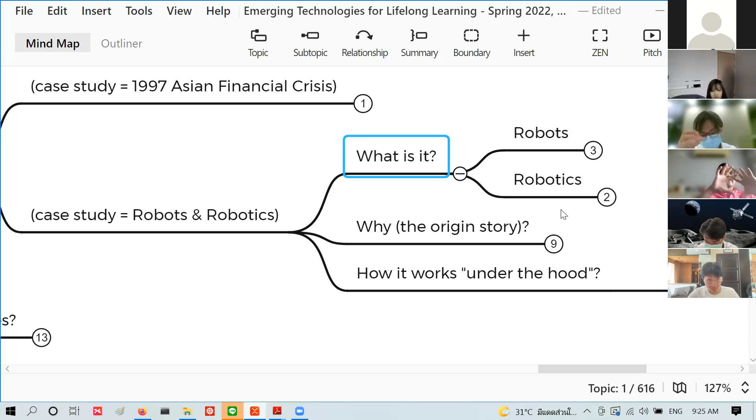The other thing is the whole art, science, technology, mathematics, computational platform - everything that underlies this whole field that develops the automobiles, or in this case, robots. So robots is sort of like the thing itself. Robotics is the art and science that basically produces a robot at the end of the day.

So robot - what is a robot? To give you a good definition, this is our working definition: it is computerized electromechanical machinery, designed to do things that we humans are not able to, cannot economically or safely, or simply don't want to do by ourselves. Now this is going to be our operational definition - I'll show you what I mean by that in a minute.

What I mean is that some robot use cases would be playing into this aspect - in other words, you have this kind of robot because human beings are not able to do it. In some cases, we can do it, but we can't do it economically or safely. In some cases, we just don't want to do it ourselves.

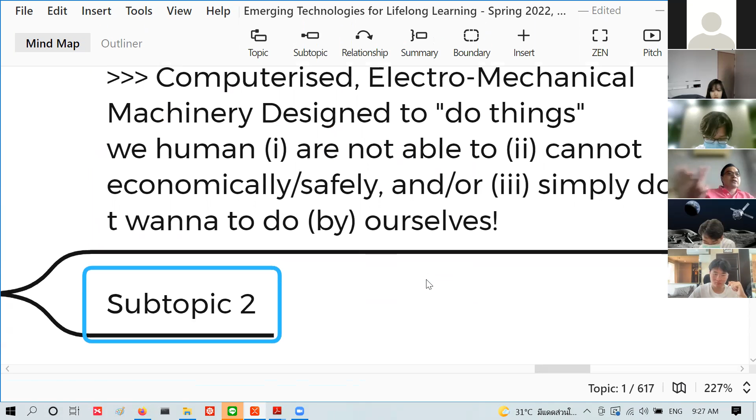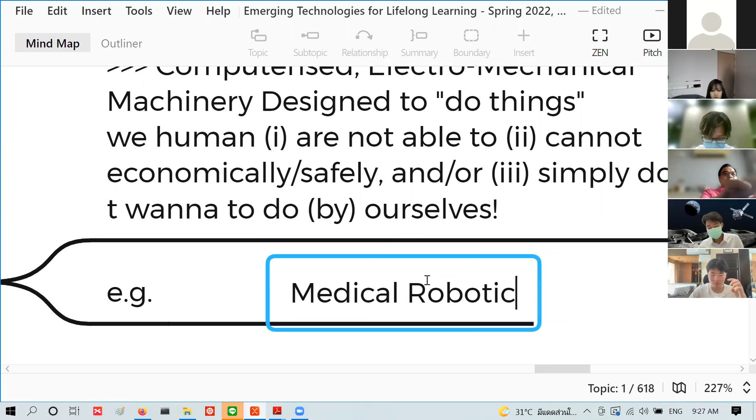So when we say we don't want to do this by ourselves, or we cannot do this by ourselves, robots then become an extension - so we still do it. For example, just to get ahead of the game, I'll give you two forms of robots. Let's say, for example, we have medical robotics used in surgery, and then we have a Roomba.

You know what a Roomba is, right? It's a robot that vacuums things for you.

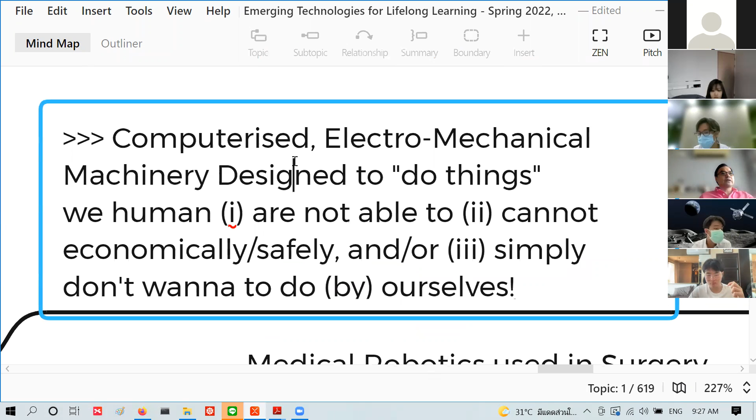In this case, by the very definition, it's this: computerized electromechanical design to do things that we humans are not able to do by ourselves. Okay, this will be the case.

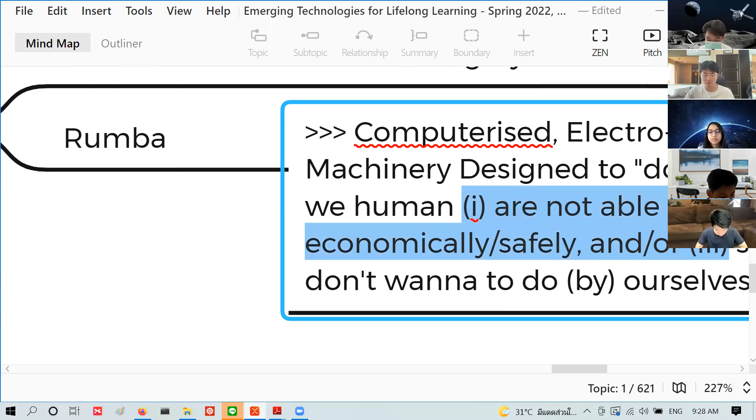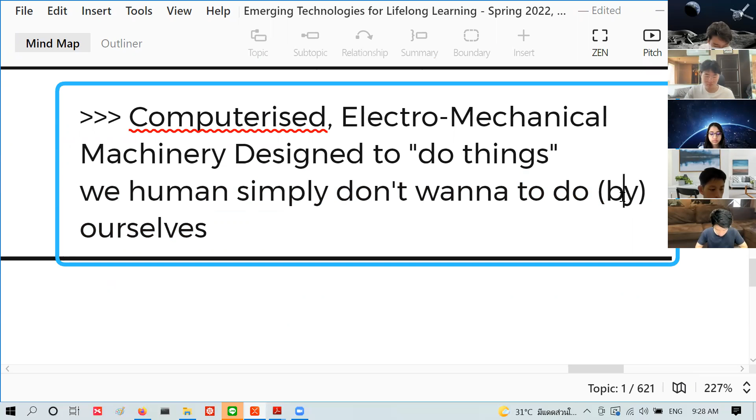On the other hand, if you're talking about Roomba, it's computerized electromechanical machinery to do things we humans simply don't want to do ourselves. So that's very different. Okay, so both of these are definitions of robots, but how much of a definition is different, right?

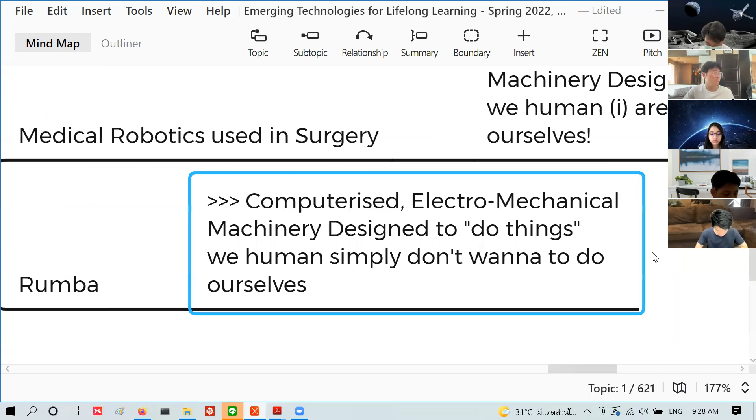In medical robotics, used in surgery, it's designed to do things that we cannot do by ourselves, because it requires steady hands. It requires a lot of strenuous force. If you do surgery, it's delicate, but you also have to spread chest or bones apart or whatever, right? And you also need a lot of magnification.

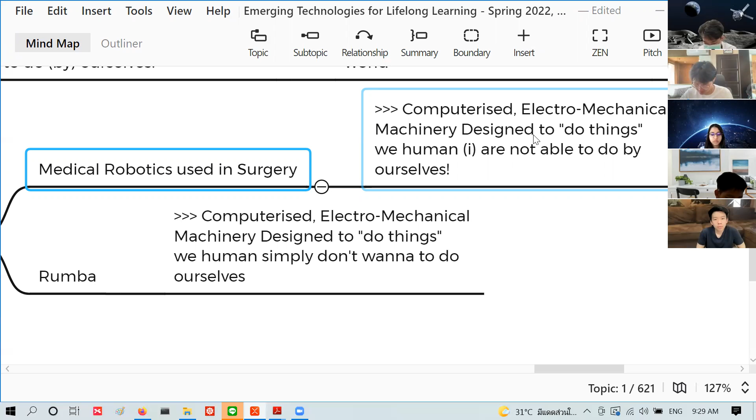Sometimes it's very precise, in a very hard to control environment, because you're working in a body where the heart is still beating, let's say. So some of the tasks are so delicate that doctors cannot do them by themselves. They're still operating the surgery, so robots become like an extension. So this is the word: by ourselves. We still do it, but we don't do it by ourselves.

Whereas with Roomba, we just don't want to do it ourselves. We just let the Roomba run. It's not something that we can't do, it's not something that we can't do economically, we just don't want to bother, right? So that becomes our operational definition.

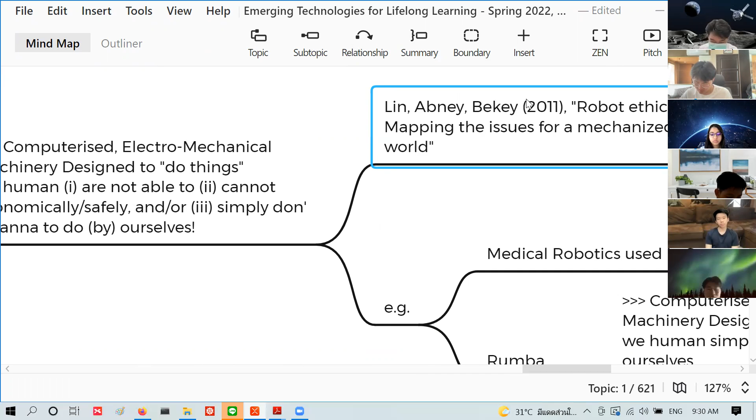But notice, I refer to this paper here - robot ethics, mapping the issues for a mechanized world - and in fact, right away, I think I said the word dirty. There it is. So robots, to quote this paper, are basically often designed, not always, to do three things, or things that satisfy what's called the 3Ds of robotics.

So basically jobs that are D for dull - that's like Roomba, right? Dirty, and dangerous. So this would not cover, for example, medical robotics in surgery, but it certainly would cover things like sending in robot creepy crawlies, robot worms or robot dogs into an earthquake disaster zone, because as you're searching for survivors, you have to crawl under collapsed buildings, which may further collapse onto a search and rescue party.

And dirty - well, you can think of dirty and dangerous together as working, for example, in a situation involving a nuclear plant disaster. Fukushima, for example, is a very good case in point. There was a lot of effort at that time to send in robots, not necessarily humanoid robots, to actually go in and maybe shut off the valves, or at the very least take a reading. So it's very dirty in that sense, and that's kind of radioactive, dangerous. So you can't send in humans, you need to send in robots.

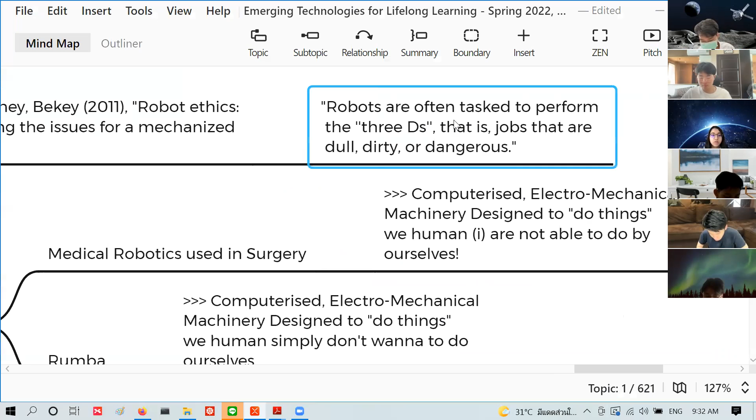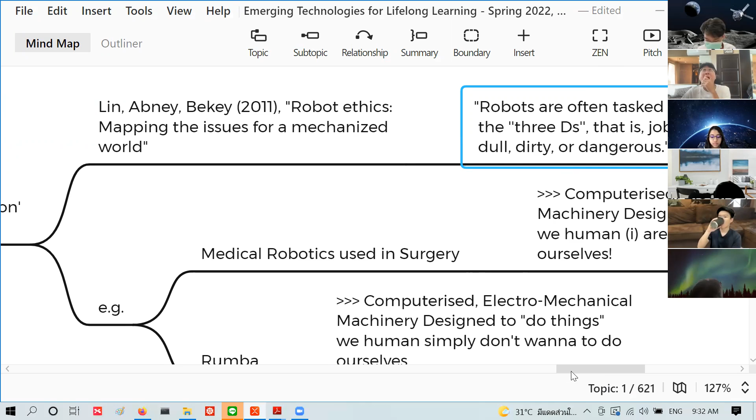So those are sort of a very utilitarian perspective. These 3Ds are not everything, but notice it's often tasked to perform - this is kind of the utilitarian perspective on robots. So this is not all, you can think of this as a subset of what robots are asked to do - more utilitarian things, something like cannot do economically, I don't want to. Fine, so that's the definition.

Now, why do I want you to pay very good attention to this? Because there are actually three different words here that you may not notice: one is computerized, one is electro, one is mechanical. Now it goes in this order. You can think of it this way: historically, robots were mechanical. We had mechanical robots.

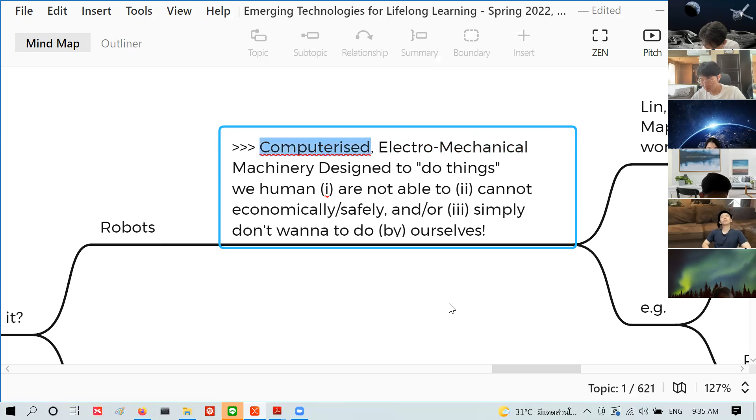So this definition is where we stand today: mechanical, electro, computerized. That's also the reason why in university you can study mechanical engineering and end up being a key breakthrough innovator in robotics. You can study electrical engineering and also be a key innovator in robotics. You can also study computer engineering or computer science and be in the driving seat of the robotics revolution. These are the three fundamental disciplines that drive robotics.

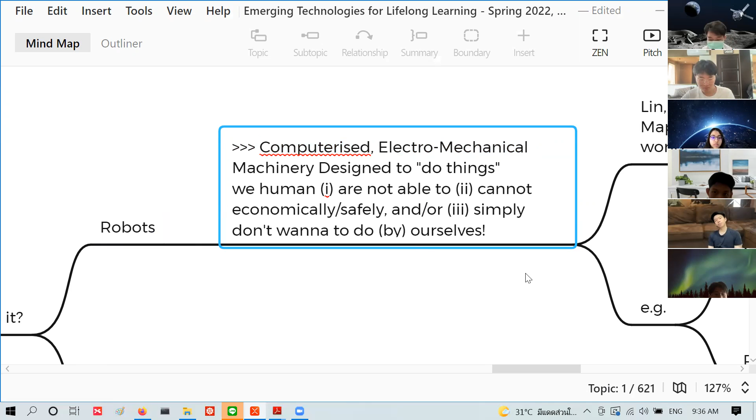So in the spirit of integrated innovation, you can say that robot is an innovation that came from integrating not only mechanical engineering and electrical engineering, but also computer science and computer engineering, which includes AI and everything else that comes with that. This is very much in the spirit of the school: integrated innovation. So that's kind of like a definition.

That's a definition. Now, what is robotics? Well, robotics is kind of like the science that produces it, so to speak.

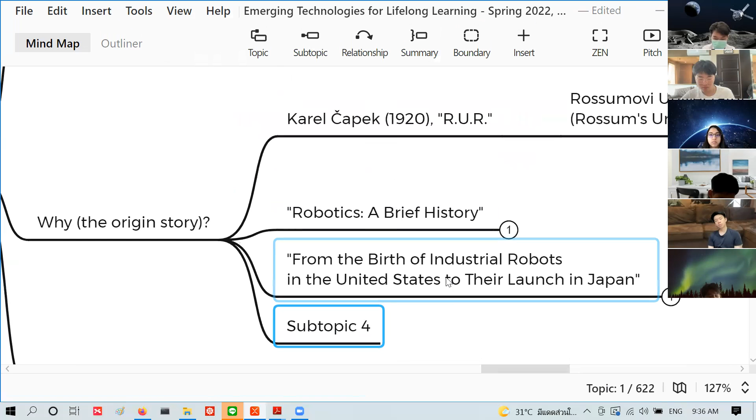Now this is very important: construction and use. So there's construction, how it works and so forth, and use, that's where the use case thing comes from. Now, I expand this definition a little bit to the art and science of engineered creation. I use the word carefully, creation, in this case, not just construction, because nowadays you actually are very creative.

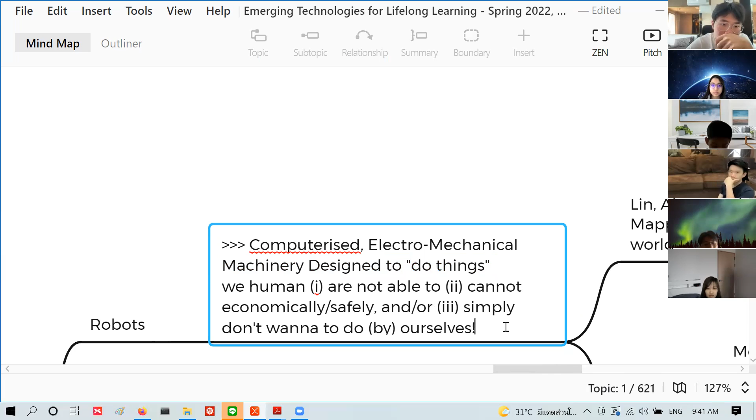So the emphasis, very important, the emphasis is on the do. Robot is designed to do. Okay, now this becomes a little bit more involved, we'll see later. Okay, so that's it. That's what it's designed to do. That's what it is. It's designed to do things. Okay, it's not there just for entertainment.

If you take this apart, I don't know if there are pictures of it, of the gearing. Yeah, I think maybe there's a website that shows a picture. Anyway, it's fascinating, when you go inside you see it's like a mechanical watch, except it's a lot more intricate, and it's programmable even. You can literally program this to draw a signature. So in a sense, if you can think of making a signature as a task, then yeah, it is a useful robot, so to speak.

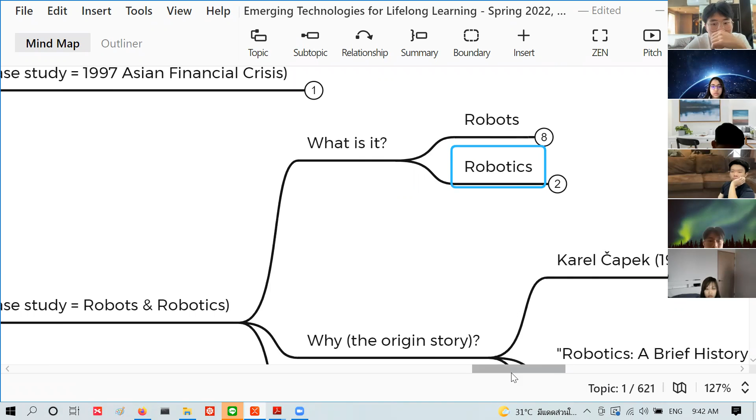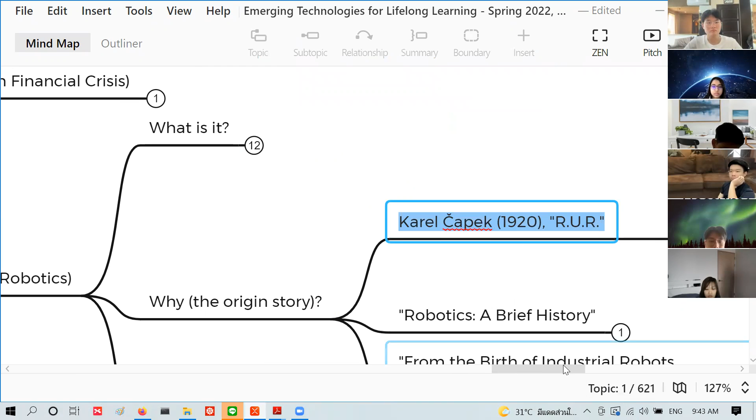Robot doesn't mean anything fancy. Robot means something that's doing some kind of repetitive task. So basically, this guy invents robot to do chores, do things that he doesn't want to do. So basically it gets back to this very definition, right? So this is what he created robot for. He creates a robot for things that he doesn't want to do. He doesn't want to do.

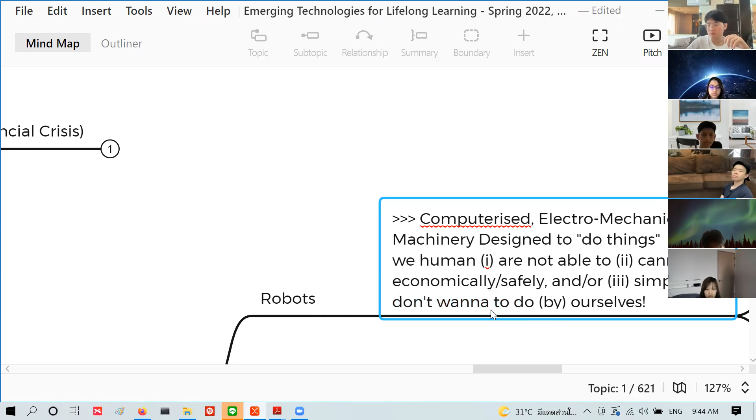So let's say humans are lazy, we want people to serve us. We want servants, but we can't have human servants, so we have mechanical servants. So think of robots as mechanical servants, do things we don't want to do for us. And by things we don't want to do, we mean activities that are not creative, mundane, tedious. The emphasis is on the word tedious, tedium.

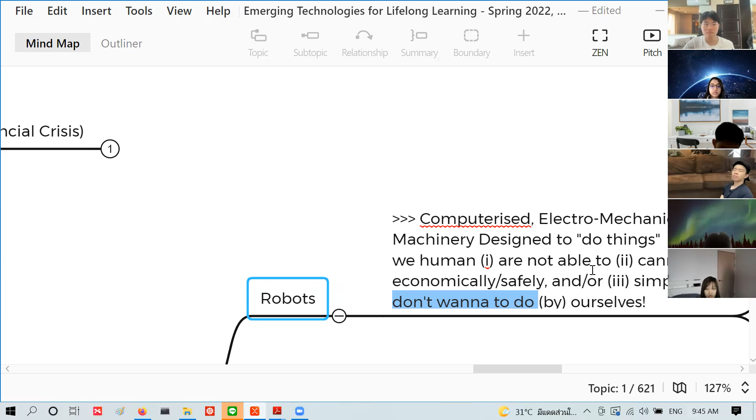Okay, boring, tedium, daily grind. Sort of thing that in a way is a reaction to the Victorian industrialization, where human beings become something monotonous, doing something very mechanical, very monotonous. So if you have this robot, that's great, right? So humans don't have to do monotonous things anymore. So that's the origin of the phrase, right?

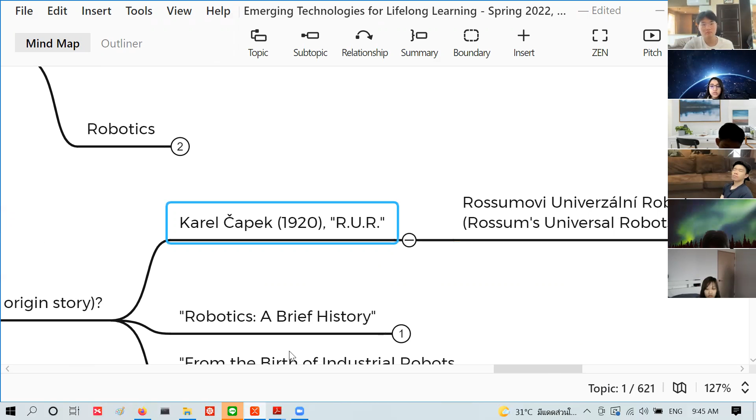And in fact, I gave you some very good reference here, a brief history. Now, a website I want you to look at is very interesting, because this is what happens in fiction: this guy wants a mechanical thing that does things for him, but the things he wants them to do were previously done by humans. This is the important distinction.

So, the machine that he creates to do things for him resembles human for that very reason. So this humanoid thing is different from this other one, where you make the thing look like a real human because it's a marvel, it's pretty, right? It looks pretty.

You want it to have a human-like form, okay? You want it human-like because it's a joy, it's wonderful to look at. You can say, yeah, this humanoid robot is pretty handsome, but the crux of the matter is it's supposed to do things previously done by humans. So the humanoid part is because you need human form to do human tasks. That's what it means.

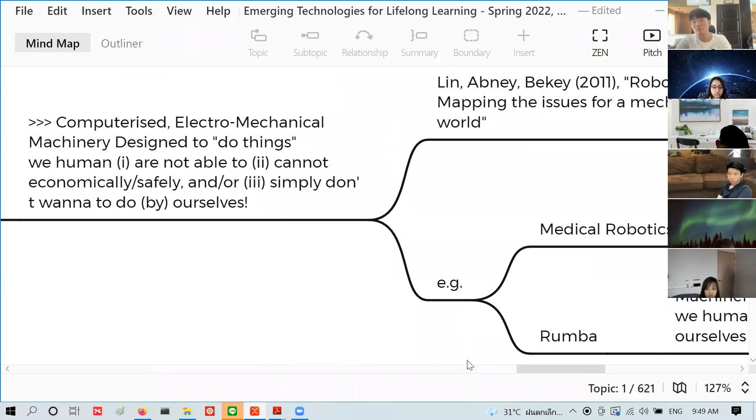So this became the first instance where you have this thing - we are not able to do in humans. There are two things we cannot do: lift heavy things, or be extremely precise on a nano scale or micron scale.

The crane was invented to do things that human beings could not do, right? Well, this is invented to do things that humans could do if it had more power, if the arm were bigger. Okay, so that's what makes this different from a crane.

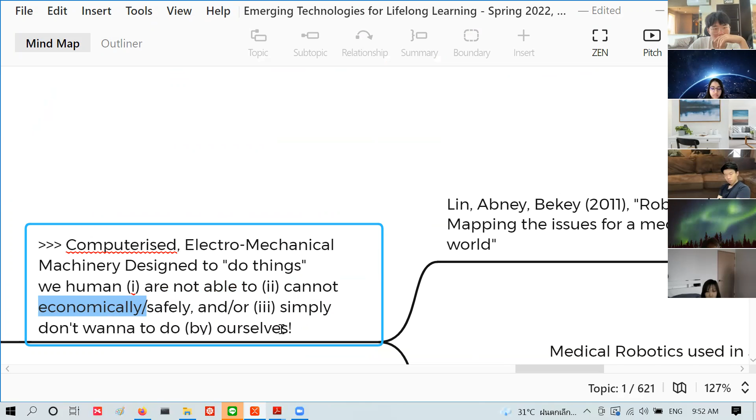So nowadays we get to the point where this definition is not the case. It's now this, okay. You can still hand make cars - in fact, some old school auto shops still pride themselves on handcraft. But you can't do it economically, you can't mass produce, so economically becomes the key. So nowadays, if you're talking about any kind of mass produced car, it's volume, it's quick.

So obviously this is Kawasaki side, so that's kind of called Kawasaki robot, but you can have many others. Nowadays you can't really make automobiles without robots economically. You just can't scale up.

And then this becomes the next thing, which is to sort of democratize the use of robots for everyone. So think about it - you used to have a big computer that was used by companies, and then you have personal computers. Well, now you can have personal robots. So it's moving to that end. Anyway, this is what I mean by the historical roots - that's the origin story.

Now, how it works under the hood. This is something that's a little bit beyond us to really understand how it works under the hood, unless you go into the applied digital intelligence track, where you'd be able to take robotics - I encourage you to do so. Not even from our class, but literally cross-register with Chulalongkorn's engineering school, cross-register with their robotics. But what I want to do is delineate what it means by working under the hood.

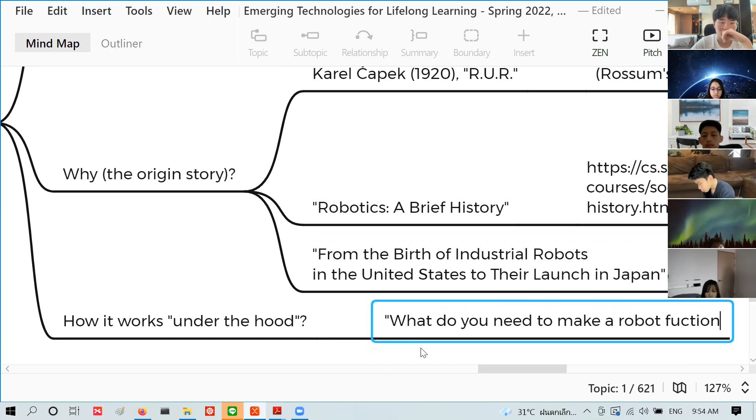Well, first of all, what do you need? What do you need to make a robot work? Well, remember, we're talking about robots replacing human beings. So what do we need to make a human? Let's imagine.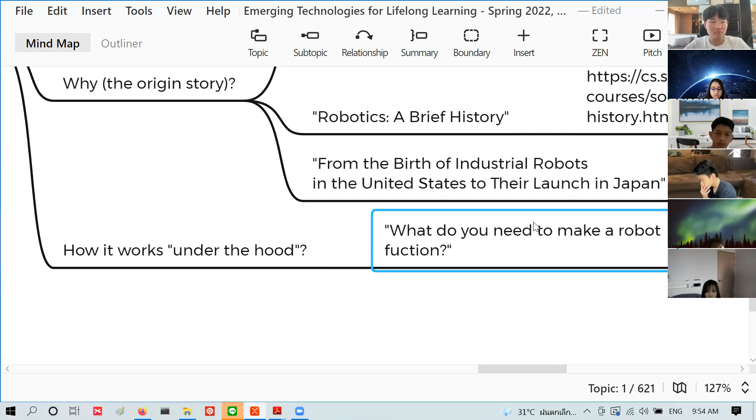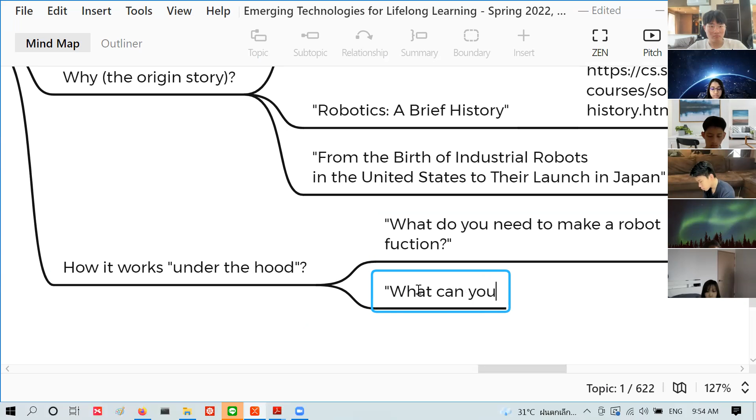What can you count on when you hire a human worker? What can you count on? This sounds like a silly and trivial exercise, but let's watch what happened. Well, what can you count on when you hire a human worker? I'm just going to make it 'he' to make it shorter. He shows up every day, energized - in other words, he's ready to work, energized and ready.

What else can you count on? He will operate within his assigned area. Now let's make this a little bit more fine-tuned: completely stationary, completely mobile, and tethered - those are the three. He's not going to wander off and go do something else random, right? He will operate within his assigned area.

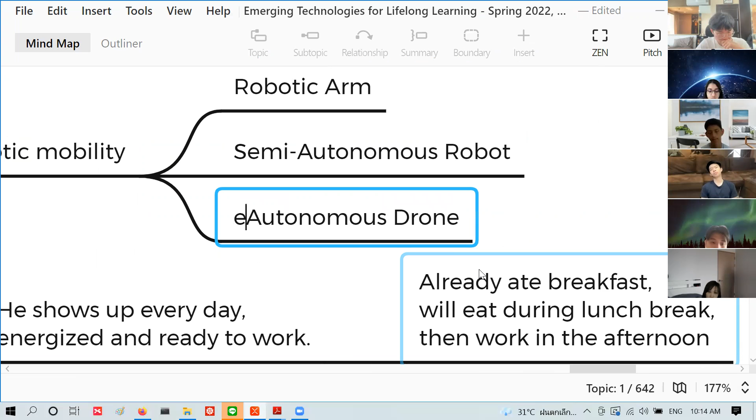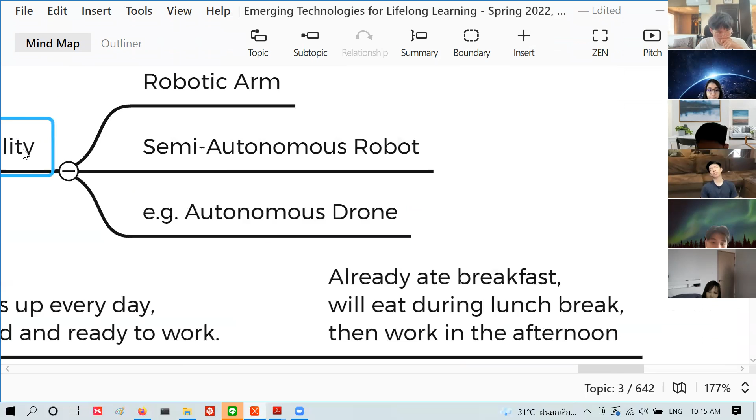So that's one thing, and then you're going to have autonomous, say, drone. Okay, so you have this case as well, right? Except...

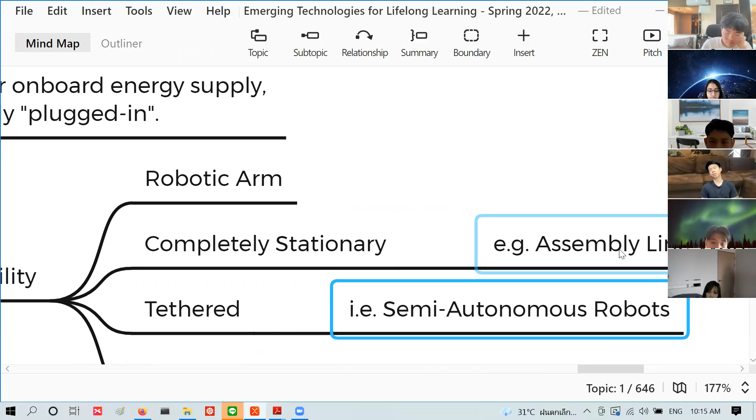Okay, so something like that, right? So robot mobility, that's concept number 2, right? Identify object. Now this is very interesting.

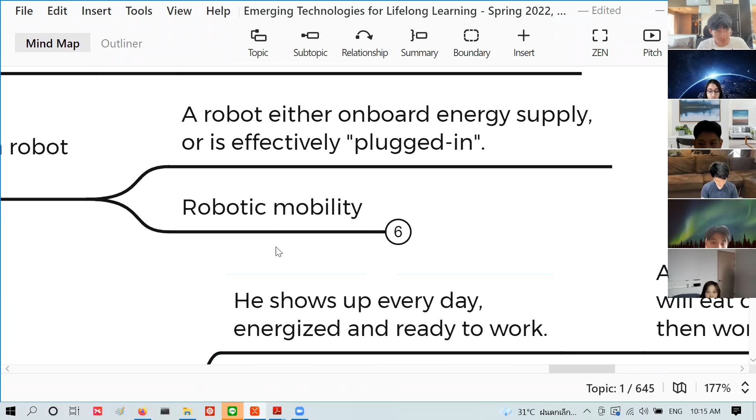This is where you kind of have something like visual recognition. Nowadays when I say visual recognition, I mean something like AI. With AI, a robot can tell whether in front there's a human or a cat. Okay, that's what you think, but robots are more general than that. In fact, visual recognition is simpler than that.

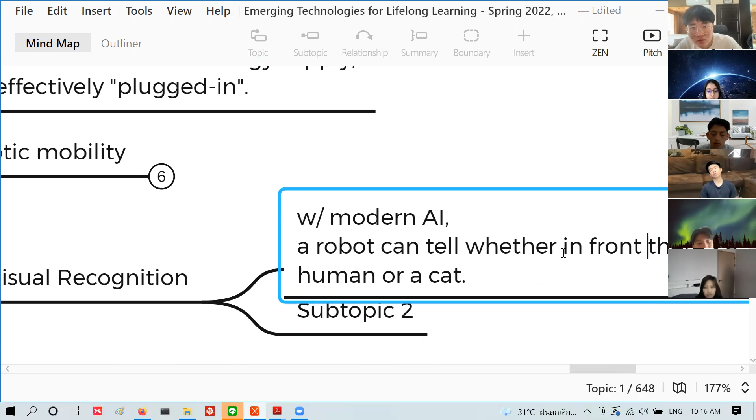How about without AI? Okay, with modern AI... Okay, so let's say with primitive AI, a robot can tell where the edges are.

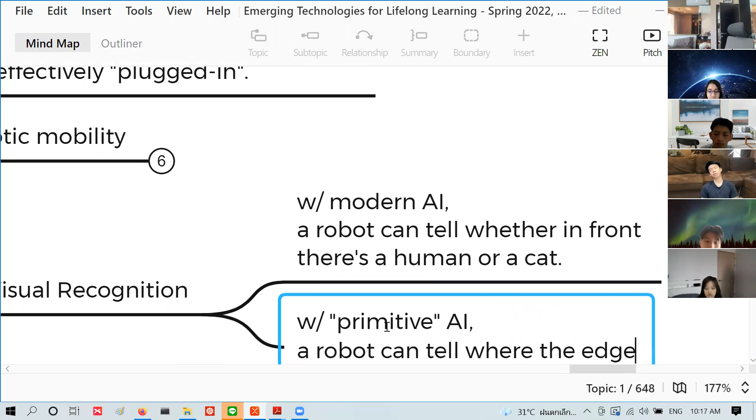That's it, because this robot is designed to pick up things. It's not trying to do something very general, it's going to pick up boxes. So all you need to know if you're picking up boxes is where the left arm should go, where the right arm should go, and how deep you should go, for example. So you need to know where the edges are, that sort of thing. This is where you go and pick up stuff, for example, with primitive AI.

Okay, with modern AI. So this thing is about identifying, picking up, and all that. He can remember today's task. So this is obviously robot programming, right? Okay, so that's what you need to do.

So execute the maneuver. This is very interesting. Robot movement. Now, when you study things, we're going to have apply digital intelligence, sort of like a make lab, like a fabrication lab. So think of little robots. What kind of movement does it have?

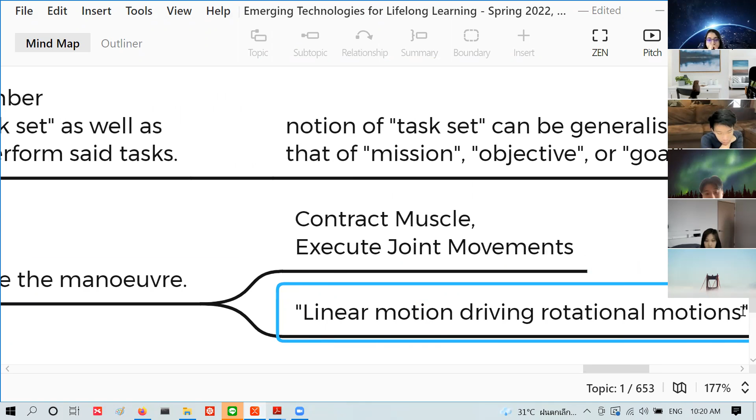So basically it is linear motion driving rotational. Now, in this case, let's look at robots. What do robots do?

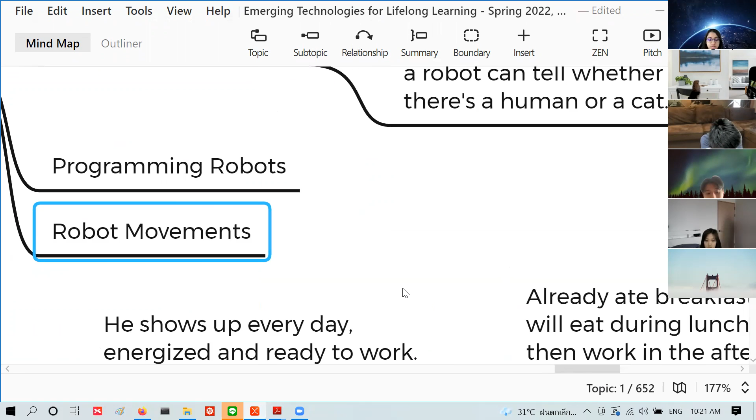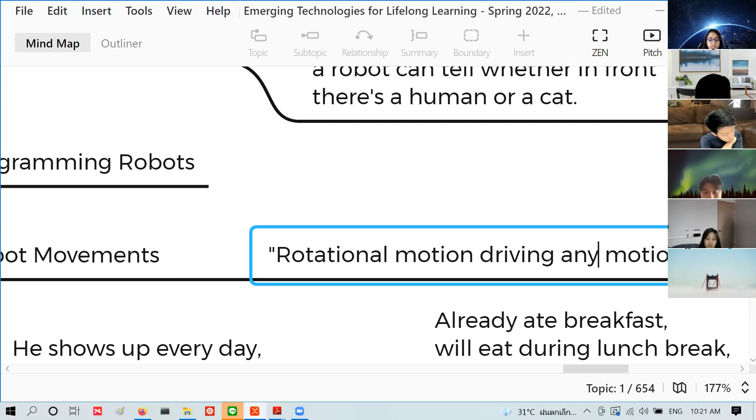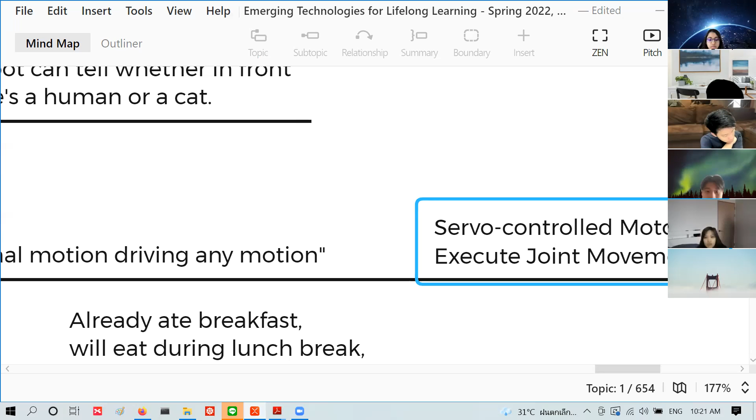Well, virtually all robots do this: rotational driving all motion. I'm going to call it downstream motion, okay, all motions, any motion. So in other words, you don't contract a muscle, right? You actually servo control a motor. In fact, there's no linear movement.

If you want to get a linear movement, do you know what you do in robotics? Well, you can think of hydraulics as linear motion, but that's also driven by a motor. Anyway, servo motor -- what you do is you get a pulley system. How about a pulley system to linearize rotational motion of a robot? Pulley -- okay, there it is. Maybe this is better. See, when I want to move things linearly, you're not pushing, you're not pulling. When you move things linearly, you actually have a pulley, and it's actuated by rotational motion.

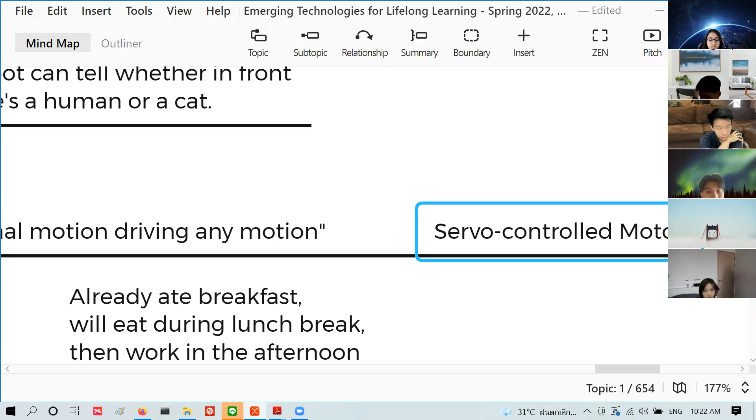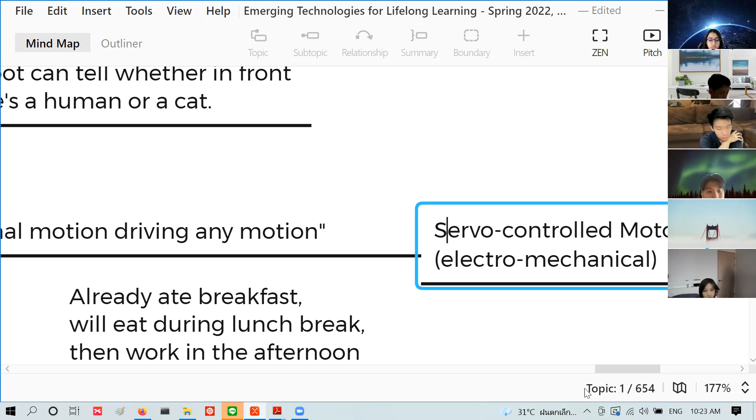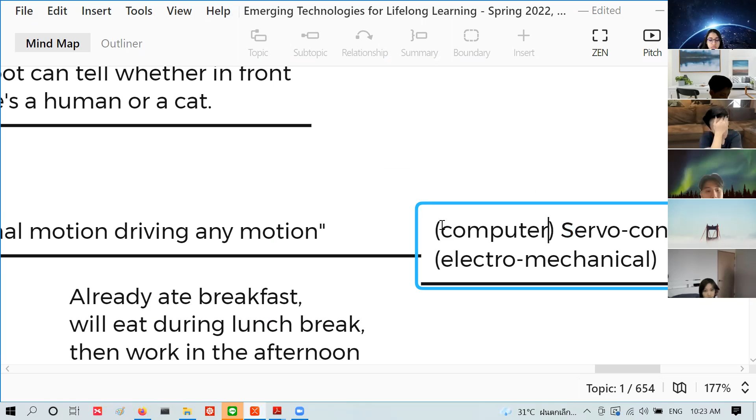So this is just a simple consequence of the fact that a motor is electromechanical, and servo is a computer -- computer servo, but it's computerized. Servo control motor. So let's go back to this thing where mechanical, electrical, computer -- servo control motor. That's how the robot movement works.

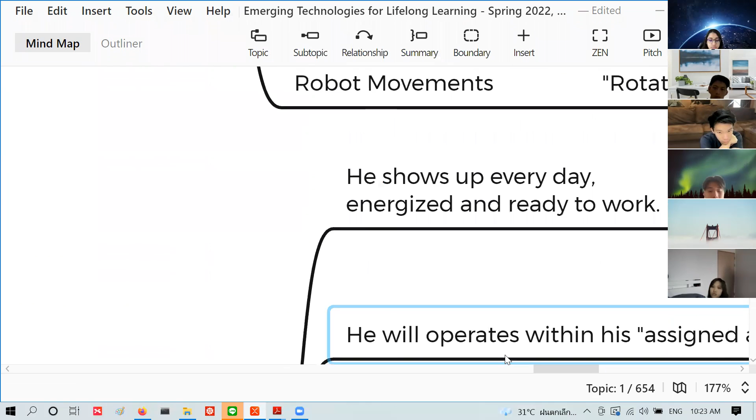So all this is in here: can execute the movement, he can adjust. Now this is extremely important -- he can adjust. So robot feedback control mechanism. Actually, control comes first, but feedback control. Robot movement, and this is a very big area.

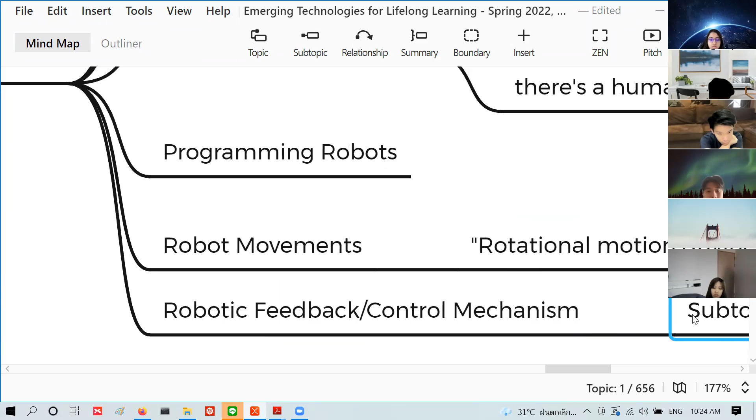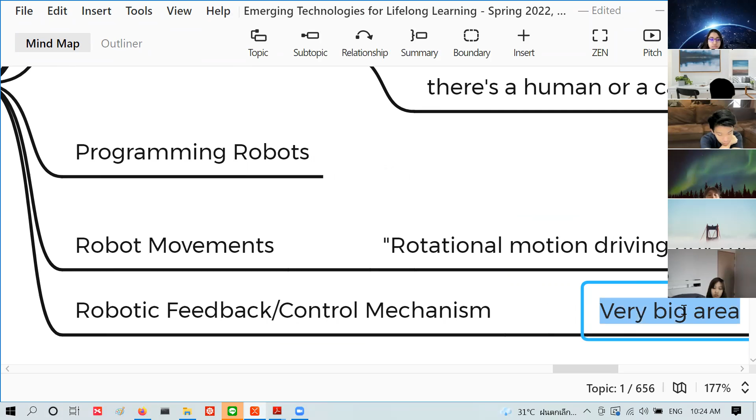Now, this feedback can be direct. Remember the guy plowing the ground and hits really hard dirt? He feels that. So in robots, there's this thing called a potentiometer. You don't have to know all this, but think of robotic arms. It's not like a ballerina where this thing just performs a movement - it has to perform a movement, but takes feedback.

So if the movement is gripping, and it's gripping something that falls out, there has to be knowledge that when you apply the gripping force, there's no resistance. When you grab a bottle, the bottle pushes back into your hand. How do you know that you dropped a bottle? Because when you grab it, there's no resistance back. But even before it hits the ground, the fact that you are squeezing, expecting to grab something that has mass and resistance, and you grab something with no resistance, means you're grabbing air. The robot has to know that.

That's the feedback. Likewise, go back to the Roomba. The Roomba can keep running until it hits the end of the floor, and knows it has hit the end, so it turns. Now, a smarter Roomba wouldn't just keep crashing into things, but would have a sensor - infrared, or radar. So that's an infrared sensor in a Roomba. It sends a sensor, and if it's coming to something solid, it stops and turns.

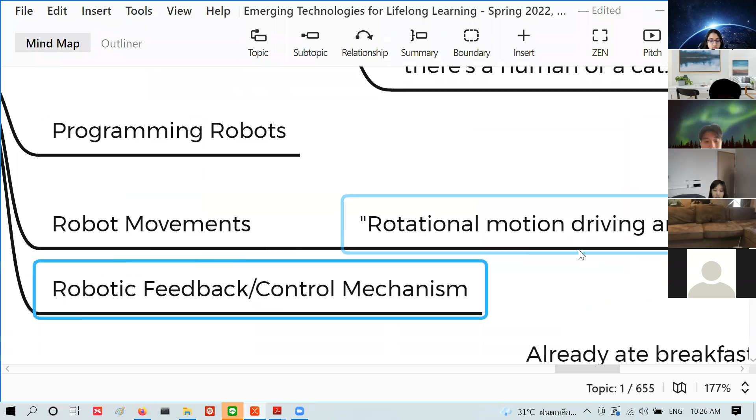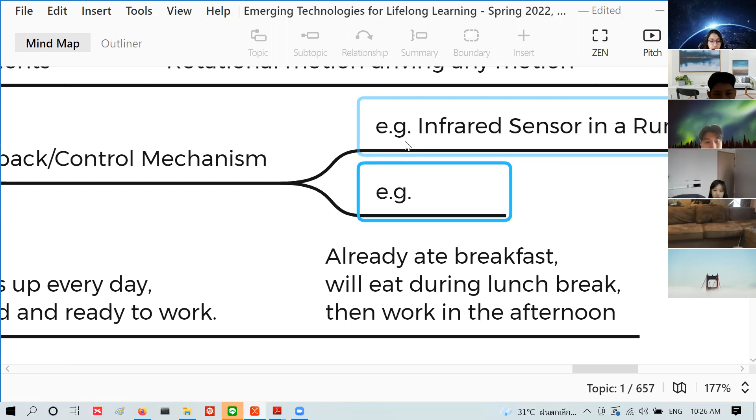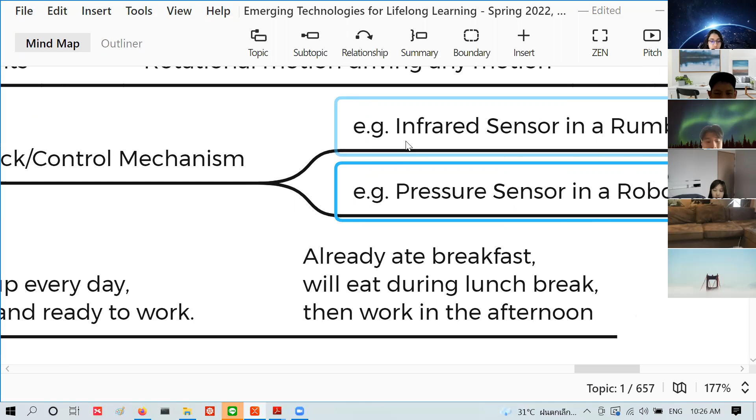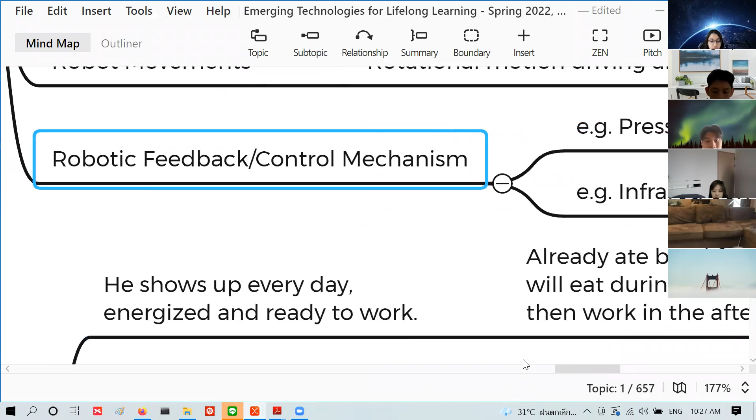Now, I saved the best for last - well, not quite. He has some intelligence, he has some wits about him. In other words, he has to be able to think a little bit on the fly. So I'm saying, I want you to go mow the lawn, and his eyes tell him there's a tree in front. He's not going to keep running the lawn mower into the tree - he'll work around it. So he has some wit - he works around the obstacle, he can plan, he can adjust.

Well, and this is where you say AI-driven robot - a robot that has some kind of planning capability. Now this is an extreme end. Even before this, there's a structural end that I haven't started yet because it didn't seem like something you need to show. But before he shows up, he is human - he takes human form. This is why you don't hire a dog to do gardening. He takes a human form and so can perform human jobs.

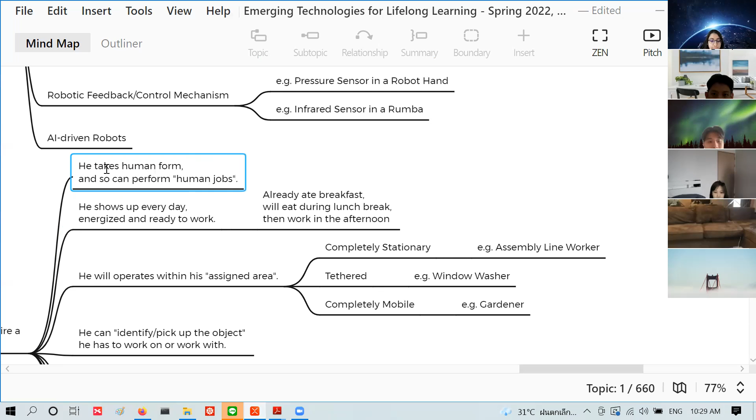Now this is where it becomes very important, this is very interesting. Robot can take human form or not, so long as it can do the job that we want it to do, regardless of whether a human can do it or not. And this is the power of robots.

Because, to be honest, if you think about it, back in 1920, think of the production budget. Let's say the story creates a robot that performs household chores like vacuuming, cleaning, cooking, and making coffee. Think of the budget in 1920 to make a household robot that looks like this - something like this, a domestic robot. Think of the budget to create something like this, versus putting a human in a plastic suit. Which one is cheaper to make? I'm being a little cynical here, but the reason the robot in the original conception is humanoid certainly is because it's much cheaper to create - cheaper to make a prop for this than to make something like that.

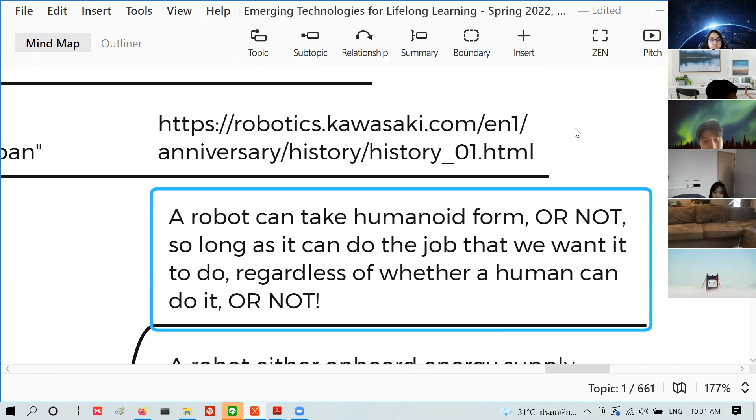But I'll come back to the big qualification later. There's a second, hidden reason why it has to look human in that play - otherwise the play wouldn't work. So not only is it a good budget-saving device, if you didn't have this, the plot would not be very convincing. There's something about the plot twist in the original play that requires the robot to look human-like, and not only human-like, but human male. There's a plot twist to it. So long - regardless of whether a human could do it to begin with.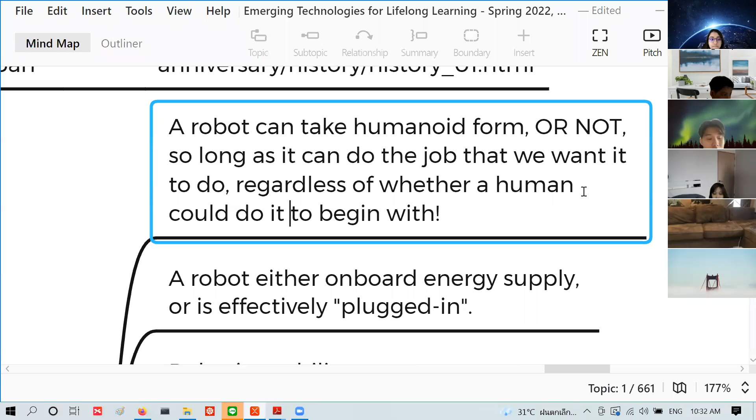This is the subject I'm going to demonstrate with the video today. So there are two things: humanoid, and then not humanoid. Let's take humanoid. There's very convincingly human, and not convincingly human.

And just human in the barest sense, what's called physiology. Okay, there are three things here.

Very convincing humans - this goes all the way back to this. But certainly we can say lifelike robot. So that's really convincing, and sometimes you need that.

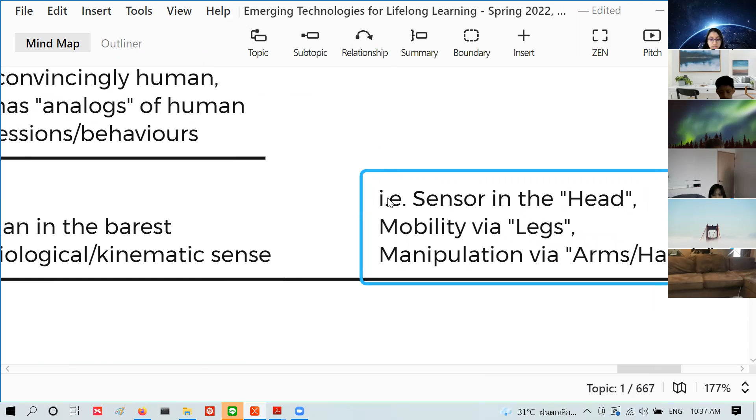Now, of course, when I say humanoid - I could say something like animatoid. I don't know if that's a word, but I think I've heard something like that. So I'm just going to put that word there even though I don't know if it exists. Animatoid, so it has human or dog or worm in the barest sense - sensor in the head.

So in this case, for dog, i.e. dog-like, four legs, maybe six. For worm or snake - actually it's not worm, it's more like snake - snake-like, moves by crawling.

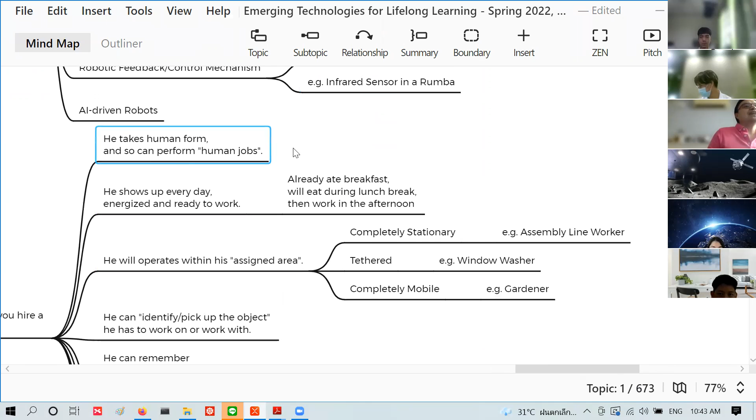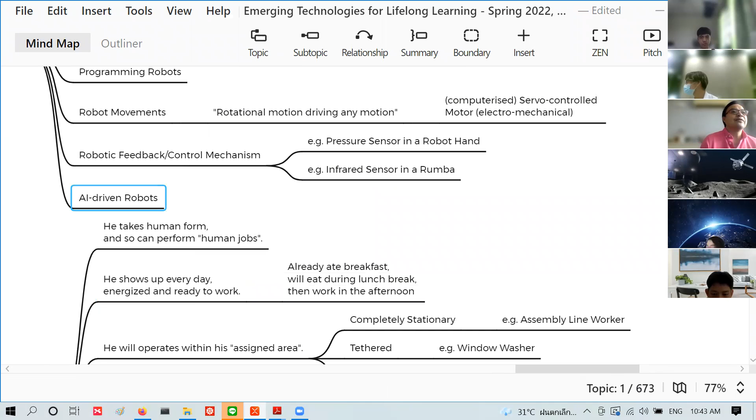So that's it - that's all the robots you have. This is very interesting. Whereas here, you're done - you hire humans and expect a human to do a human job. Here, this is where the power comes in. And here is another place where power comes in. And here is another reason the power comes in.

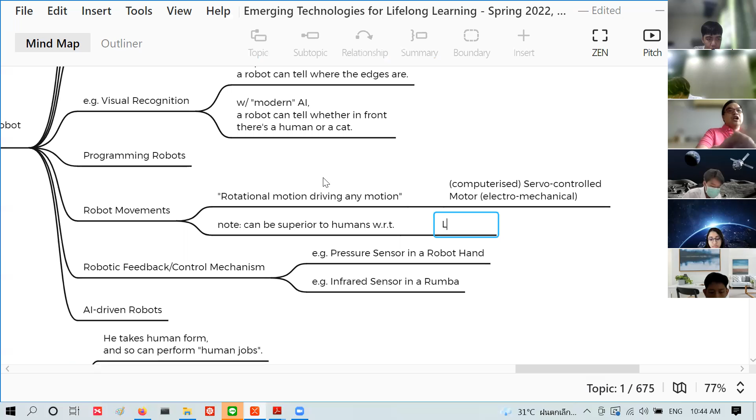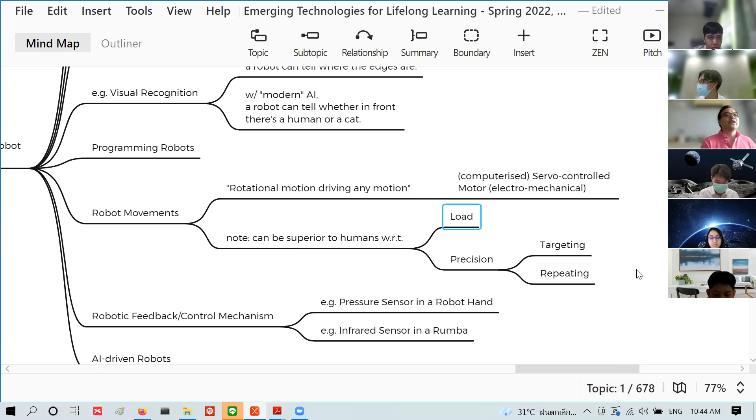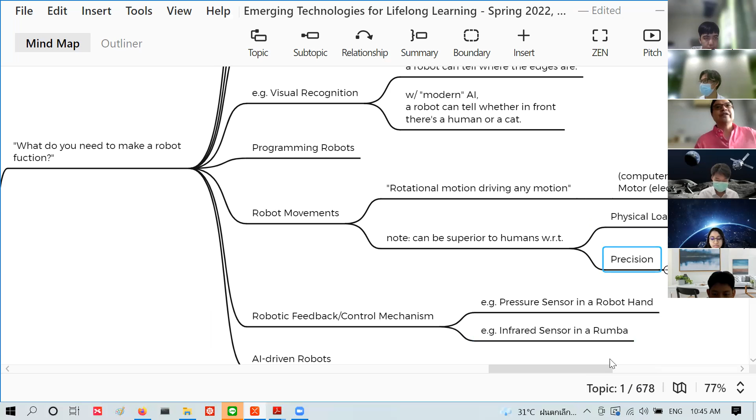Because robots can be superior to humans in terms of, with respect to what? Loads and precision. Precision means both targeting precision and repeating precision - that's very important. Human beings can sometimes do very good targeting, but not repeating. So load, meaning heavy physical load, and precision - all of this gives the power to robots.

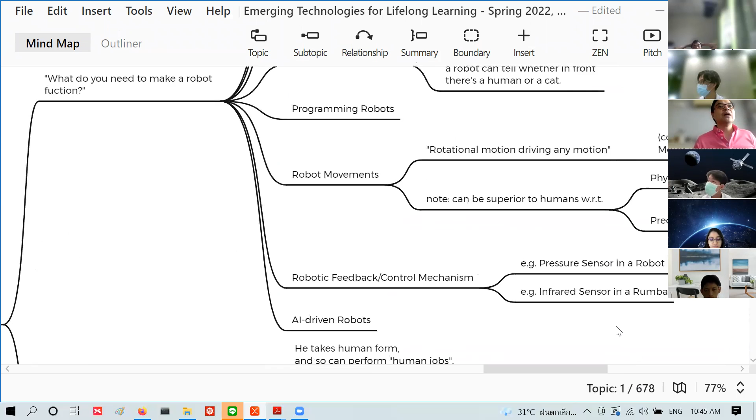That's how robots work under the hood. So when you study robotics, and you will get the opportunity to, you'll see there's some kind of analog throughout all of this. When you sit back and think about everything I've been saying so far, you'll notice there's a theme: yes, there's an analog, but you don't stick with the analog - you stick with it only insofar as it serves your purpose.

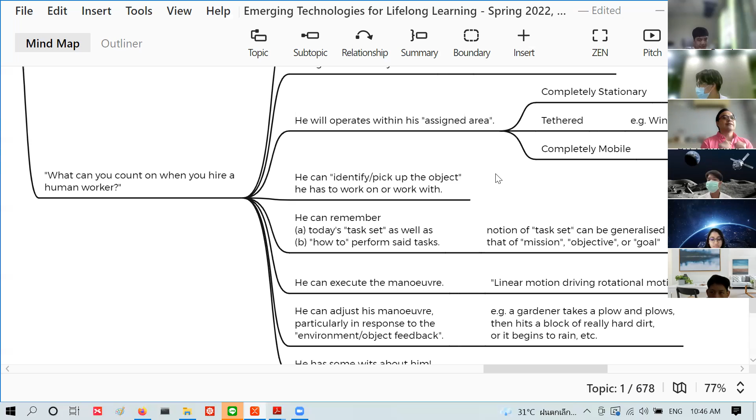For example, you can make a robot hand with five fingers because it's an analog of the human hand, but you don't have to stick to it, because it turns out three fingers will do. So you don't need five fingers - it's a loose analog. So maybe I should add that notion of a loose analog to human form and function.

That's very important. So this is why you can say something like this: you look at something, is it a robot? Some robots can have a very tight analog, so lifelike. You have something that's just an arm, a very loose analog, but there is some analog there. So you could almost imagine that a robot is - and nobody is saying this, by the way, nobody is saying this -

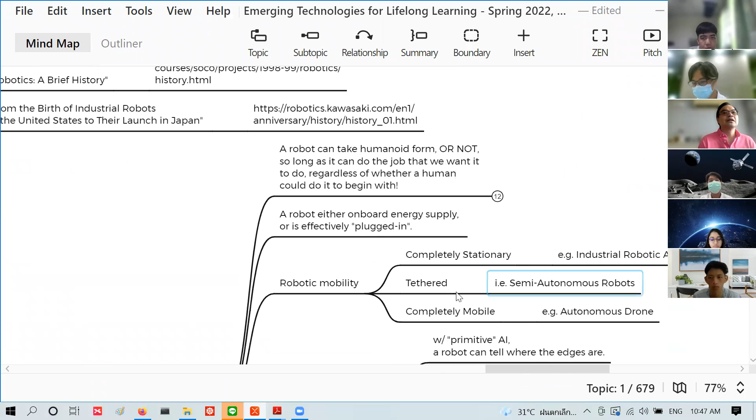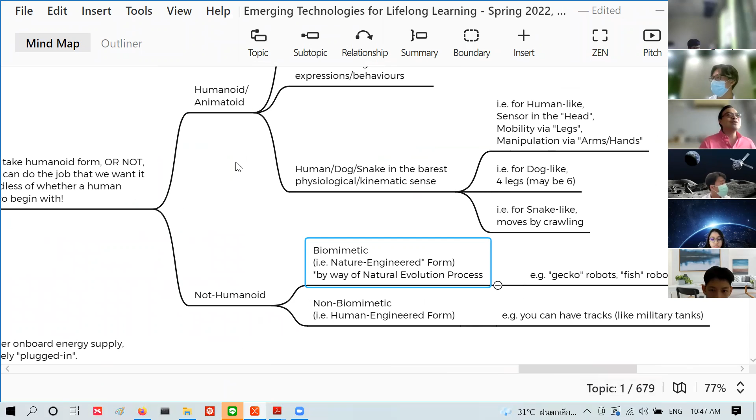you can say that this kind of robot is, in fact, biomimetic, if it's imitating or taking inspiration from nature. We'll see that with butterfly wings, geckos, worms, or dung beetles. You can say that a humanoid robot is inspired by one of nature's products, meaning human beings or dogs. So you can say that about all of them.

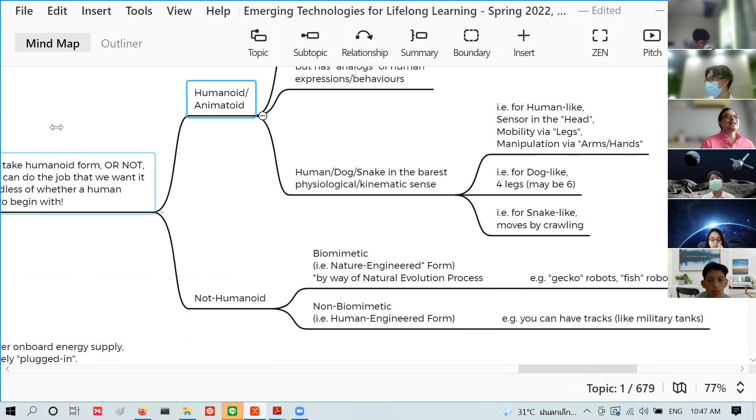So note: let's put 'humanoid' here. You could say that a humanoid robot is biomimetic, taking inspiration from a nature's solution - i.e., Homo sapiens. So instead of taking inspiration from a butterfly, you take inspiration from Homo sapiens, or particularly Homo sapiens or dogs - I don't know the Latin word for dog.